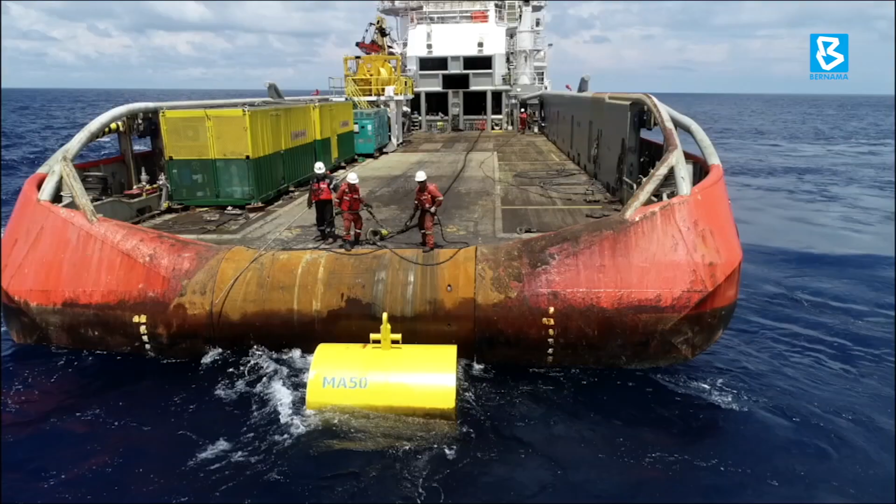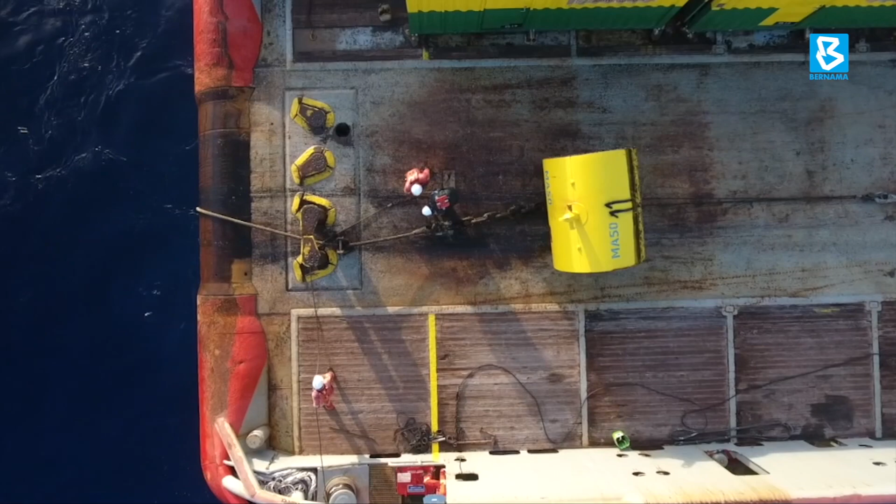Serba Dynamic Holdings Berhad is a dynamic and diversified international group with a focus-oriented approach, offering integrated engineering, contracting and maintenance services, system integrator and packages services. Their mission is to excel globally as a recognized total technical, engineering and commercial services provider, and to become a one-stop center engineering solution provider, offering engineering, procurement, construction and commissioning work, operations and maintenance services, as well as parts supplies.

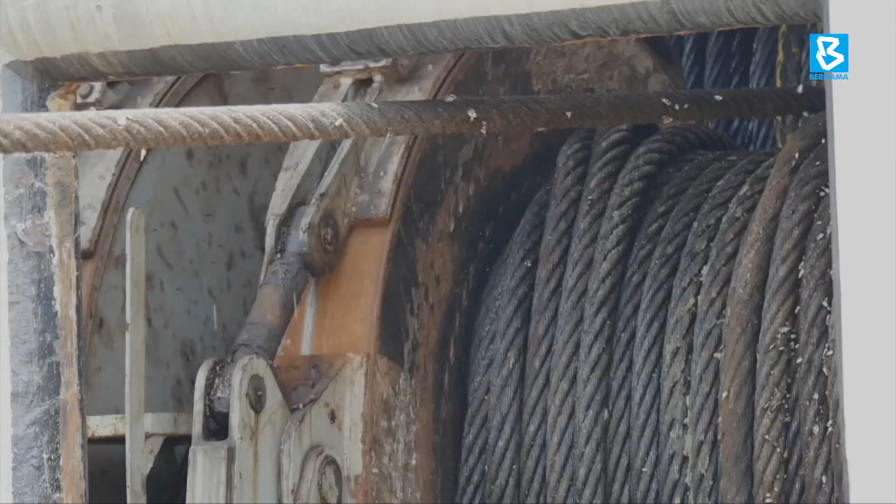I would say there are three important milestones in the entire growth of Serba Dynamic. During the early days, we were just focusing on field service capability. This means we have human resource capability from engineers to technicians to skilled labor, and of course we also need managerial project management capability. So we mobilize this team to the site and carry out the job. We call it field service activities.

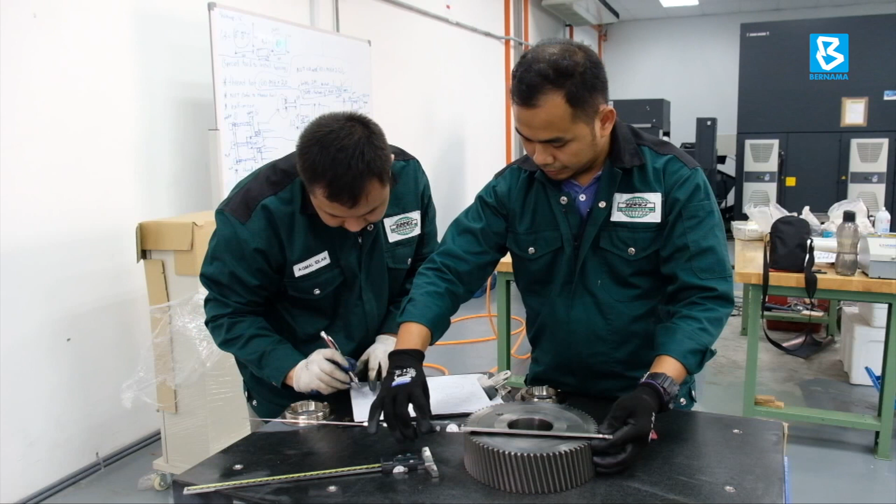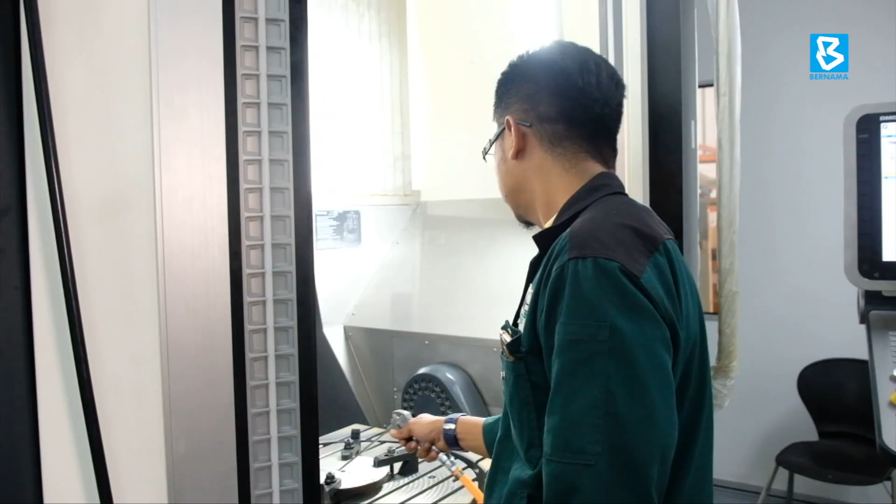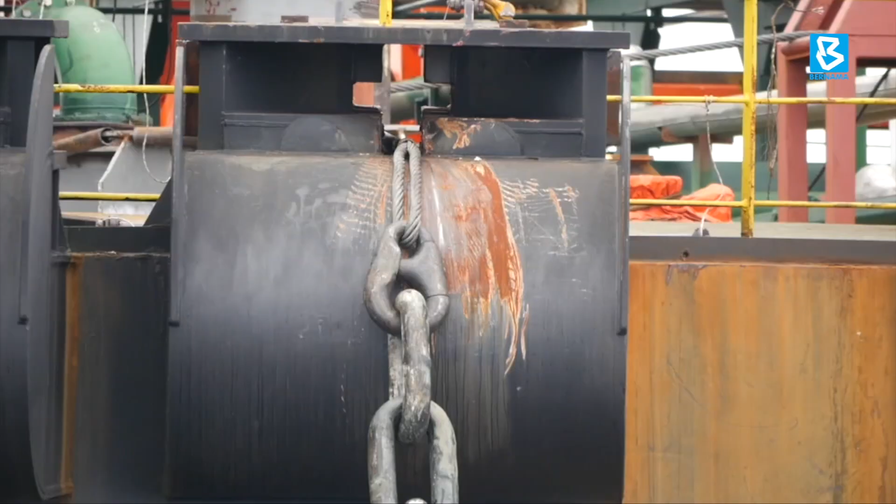In between the 26 years of our journey, after 14 to 15 years, we started our workshop capabilities, where equipment is brought into the workshops, and we have the capability to invest in buying some workshop machines. With that, we qualified for some offshore jobs under Petronas and also Shell, because in Malaysia, offshore activities are majority out of land, while in the Middle East it's different. Even though upstream offshore activities, some of it is actually based on land, so the terminology used needs to be defined properly.

But what I'm trying to say is the second milestone of growth is where we have the workshop service capability. And the third one, which is required to complete a full-fledged maintenance company, is the ability to manufacture components and parts of equipment.

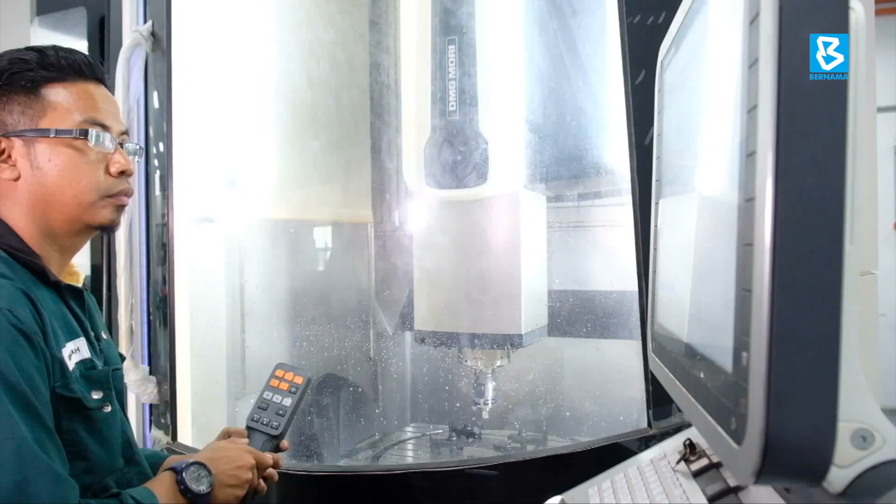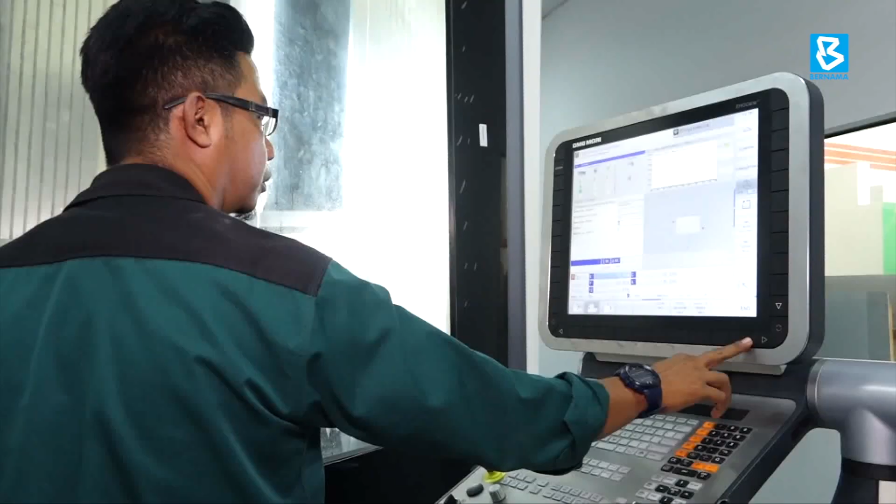I would say this was achieved via our successful listing of the company on the Bursa Stock Exchange of Malaysia, way back more than two years ago. This was a breakthrough, because through the acquisition of other companies with manufacturing capabilities, we completed the journey of positioning Serba Dynamic as a one-stop service provider. So we have the field service team, the workshop repair capabilities, and the ability to re-engineer parts and components of equipment.

Serba Dynamic's facilities now exist across continents like the United Kingdom, Indonesia and the Middle East, as well as in Malaysia, in Paka, Kemaman, Bintulu, Miri, Labuan, Kota Kinabalu, Meru and Subang, apart from its headquarters in Menara Serba Dynamic, Shah Alam. The workshop in Meru is a manufacturing and fabrication facility based on advanced reverse engineering technology and is among the main services.

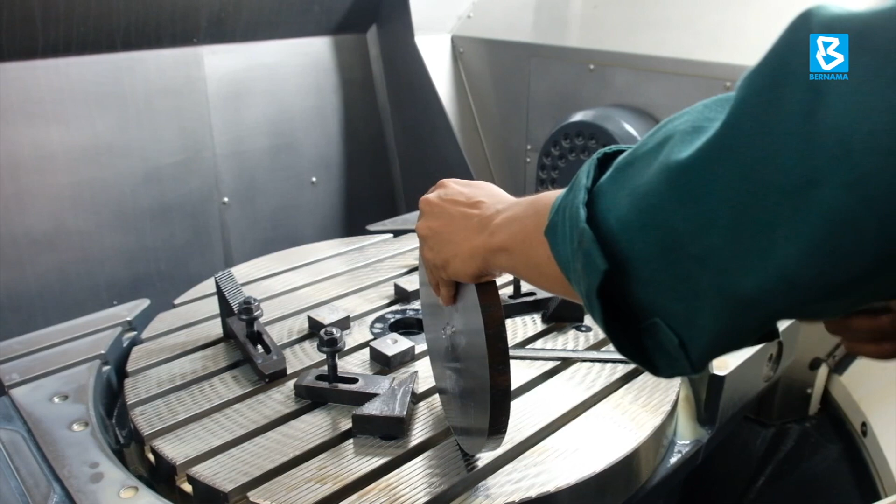Basically, in Meru, we have manufacturing jobs such as CNC machining and also assembling parts. For example, currently we are assembling a rotor lobe based on our client's requirement. So when we receive the job, we determine whether we can perform the job.

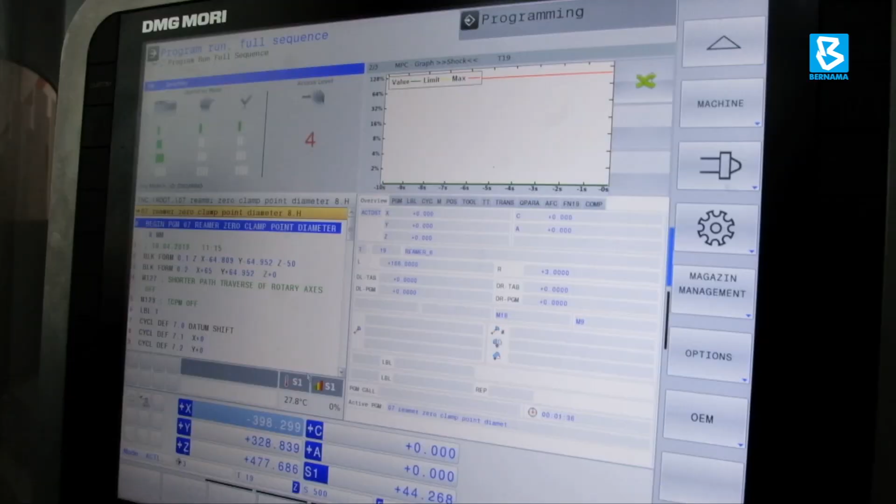We will check all the requirements, all the clearances. We will make a simulation. After we make the simulation, we will come up with the drawing, and after we come up with the drawing, we will proceed with the manufacturing job. After we finish manufacturing from CNC and also metal casting, die casting like that, we will then proceed to install.

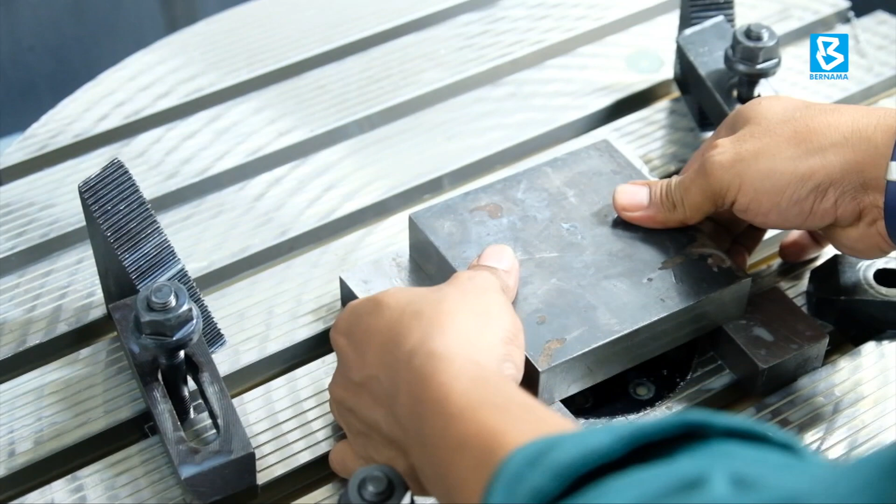Once we install, we will conduct a FAT, which is a factory acceptance test, to determine whether the equipment is safe and up to spec.

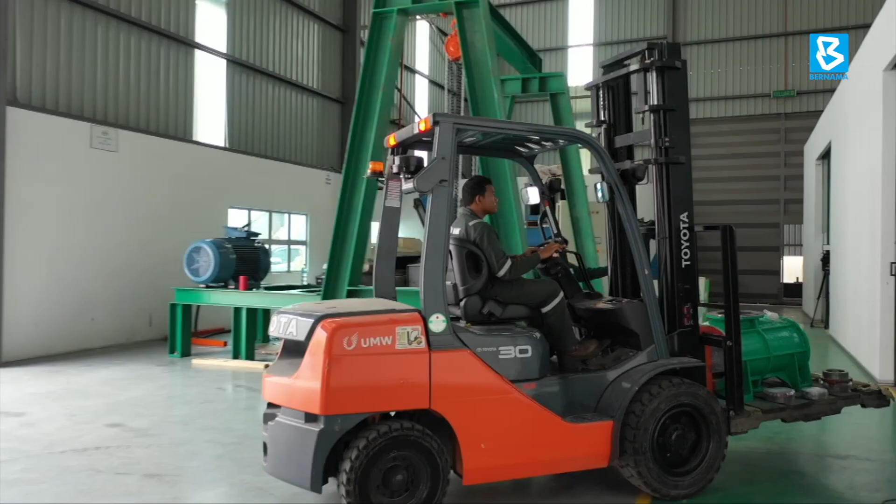Located in Meru, Klang, this workshop is led by mechanical and electrical engineers to ensure repair work and re-engineering is done at an optimum level. With proper adherence to engineering best practices, customers and visitors at the workshop must undergo a safety briefing to understand the layout of the workshop, important and risky spaces within, as well as rules to be followed. This briefing is also carried out on a recurring schedule to remind staff about safety rules.

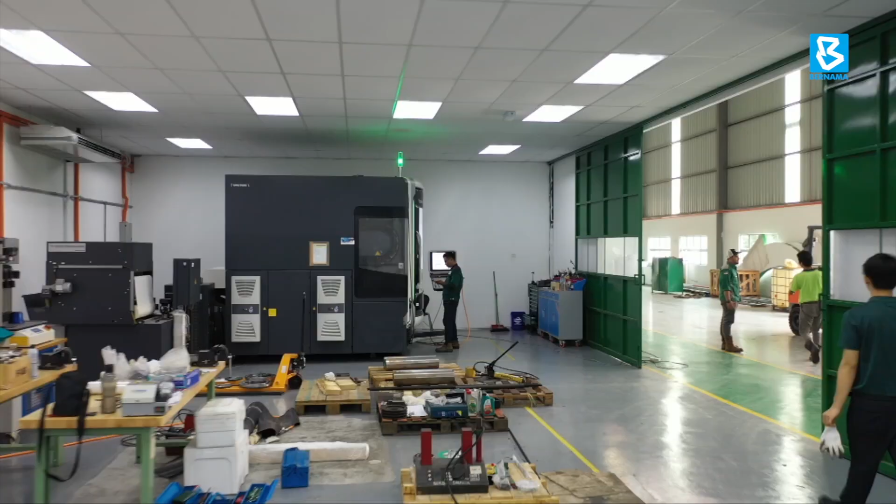Serba Dynamic has expanded the scope of engineering skills to enable reverse and re-engineering work to be done on rotating equipment spare parts, as well as repair and servicing on rotating equipment. Through this approach, customers are able to continue using equipment without interruption, either through repaired or replaced items, ensuring quality levels are just as good as new equipment.

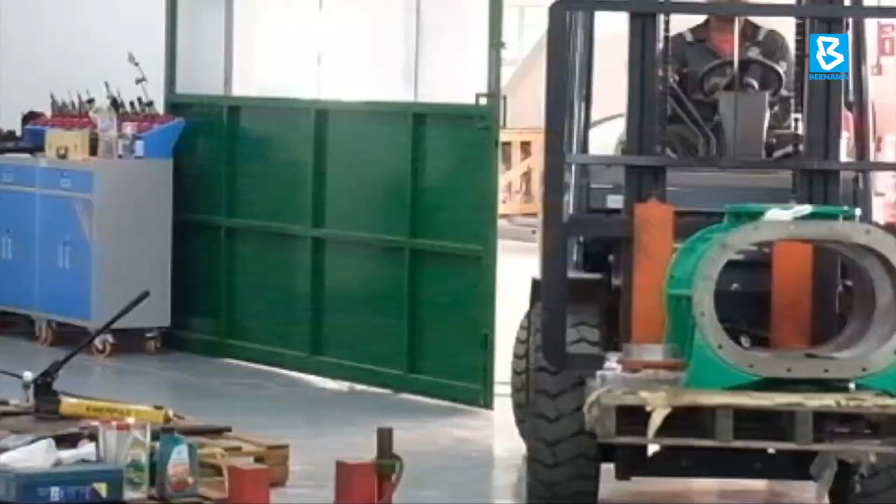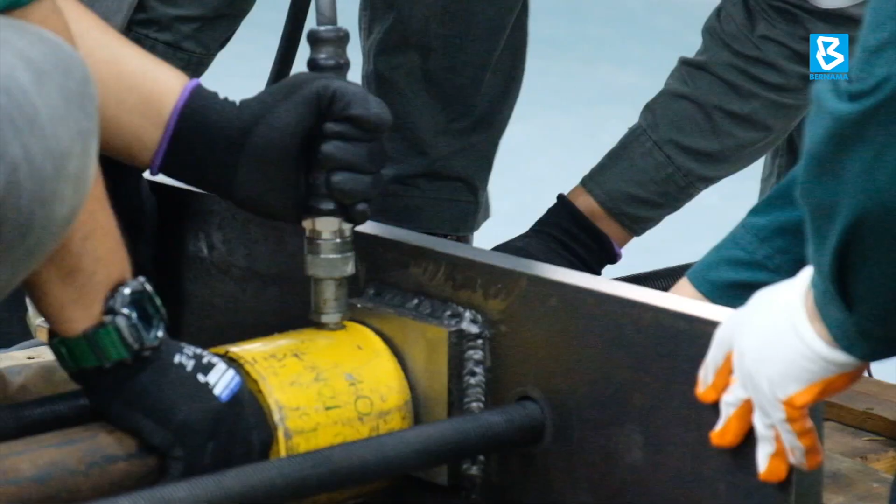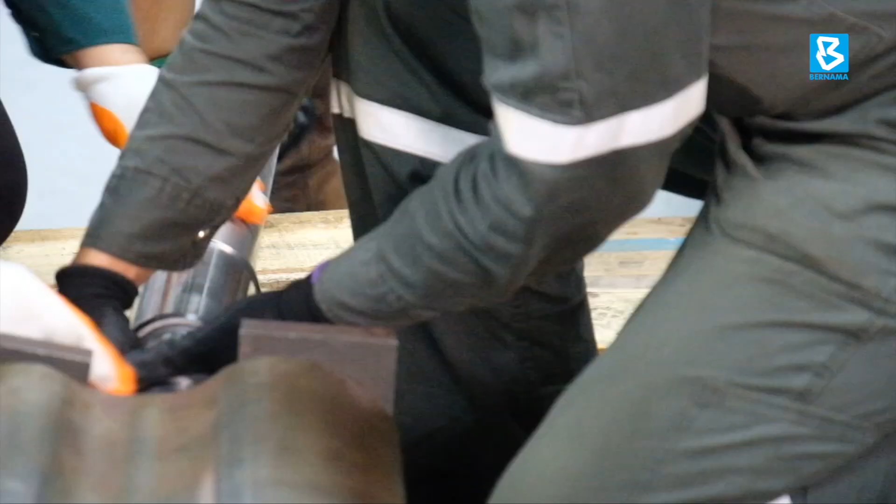The process flow for re-engineering work at the Meru workshop begins just as equipment is received from customers. With highly skilled labour, experience and machinery capacity, Serba Dynamic offers re-engineering and retrofitting services for pump spare parts such as impellers, casings and shafts, complete assemblies such as rotors and cartridges, or complete pumps.

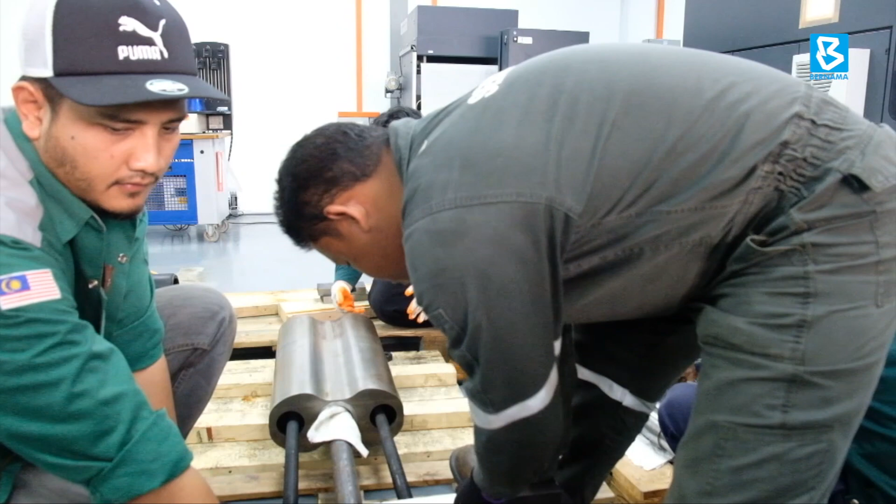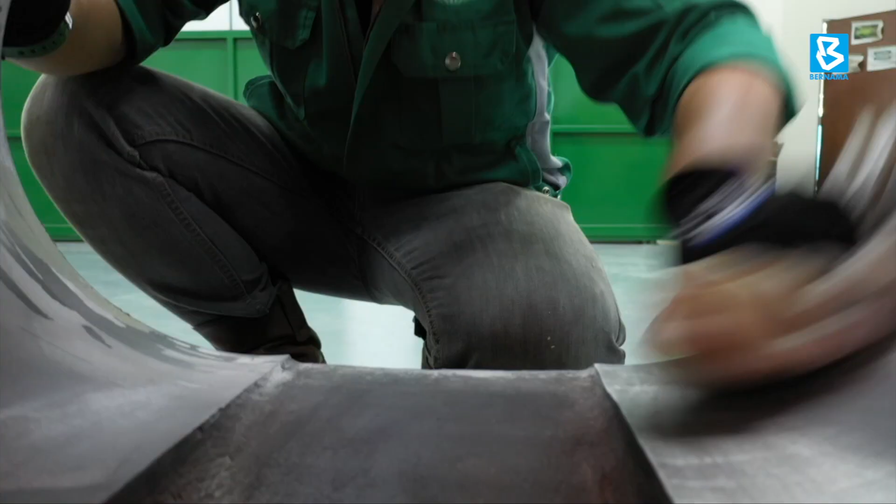After receiving the equipment from the customer, the work process enters the disassembly stage, where it is dismantled and separated into component parts to ensure exact repair work can be undertaken.

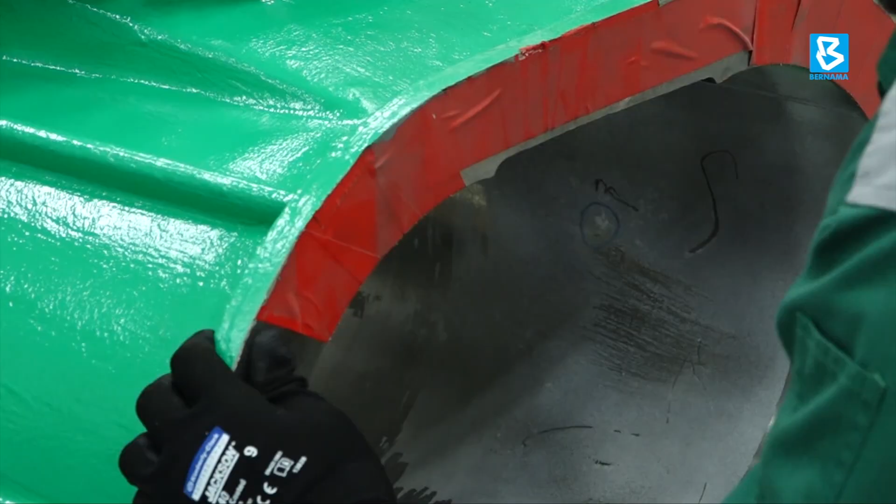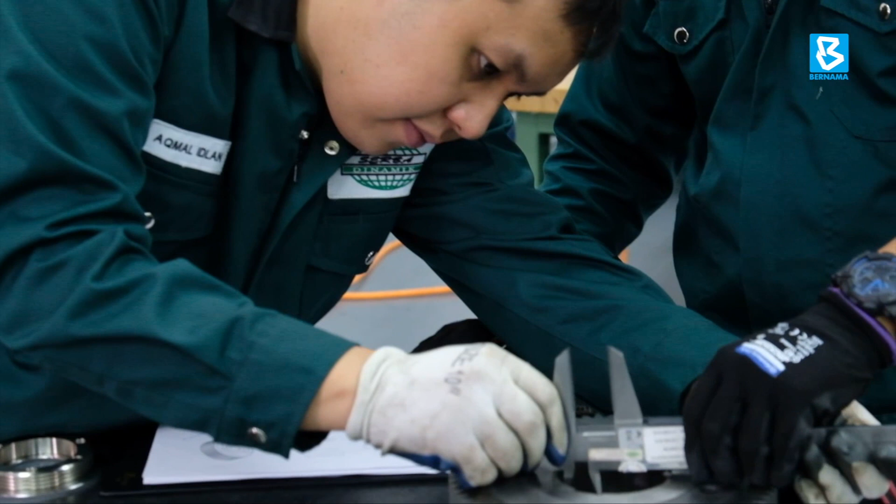Once that is completed, the involved component parts are cleaned before they move into the inspection stage.

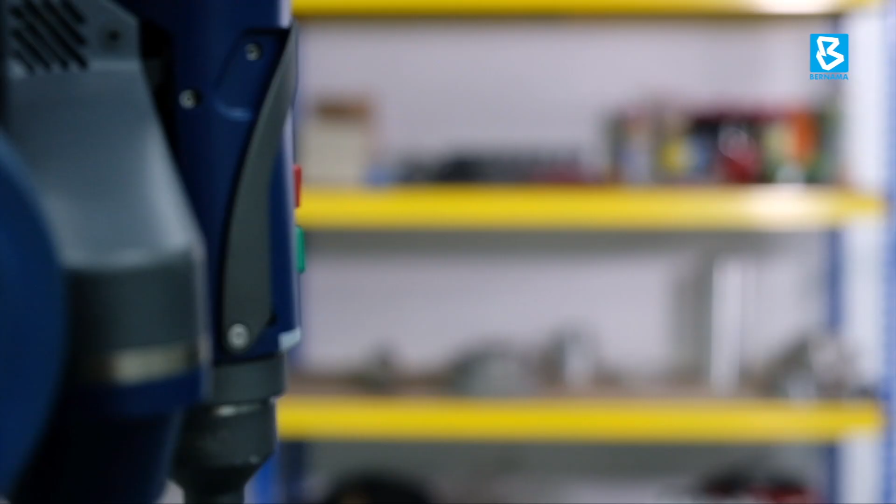Serba Dynamic is the top choice for total engineering solutions and has received obsolete equipment such as pumps and other old equipment that is no longer supported by the original equipment manufacturer. Serba Dynamic also prepares detailed sectional and full component drawings.

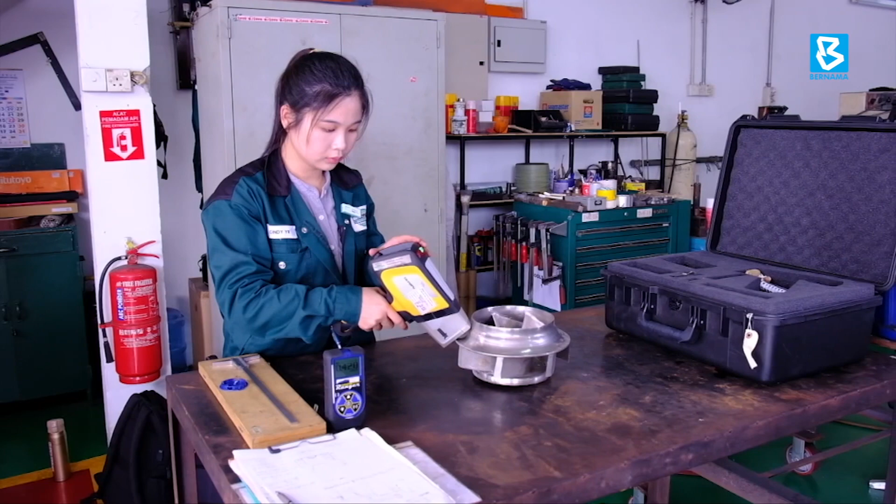The whole process of reverse engineering, retrofitting, and function of each step comprises material analysis, 3D capturing and measuring, CAD modeling, engineering analysis, and the manufacturing process, which is a CNC machine automated machining process with increased speed and quality of manufacturing, able to machine complex features.

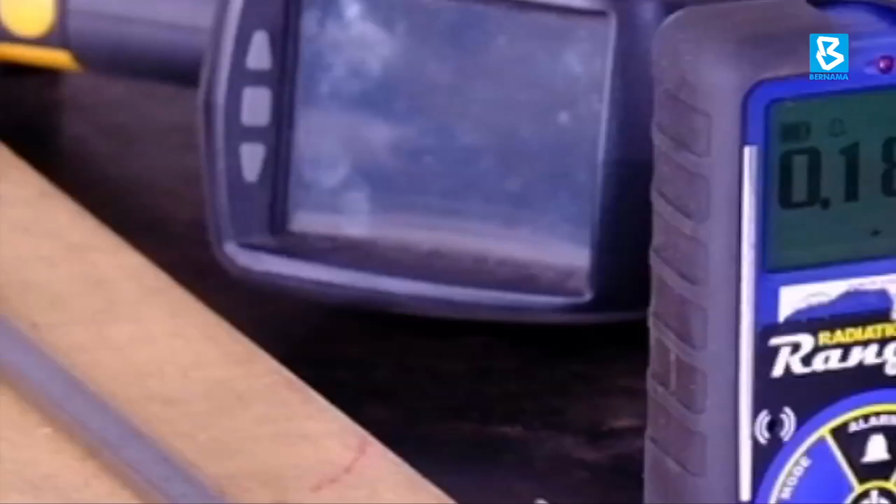For manufacturing metal products, engineering plastic products, wood products, gears, etc., the process carries out milling, turning, boring, polishing, grinding, and hobbing. Material analysis is an attempt to

determine the basic properties of materials that can be useful for designing structures, interfaces, and a variety of other things.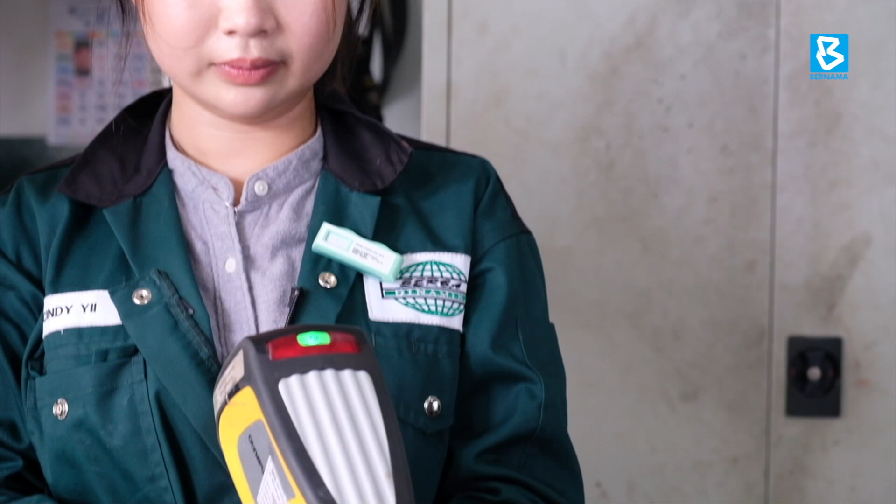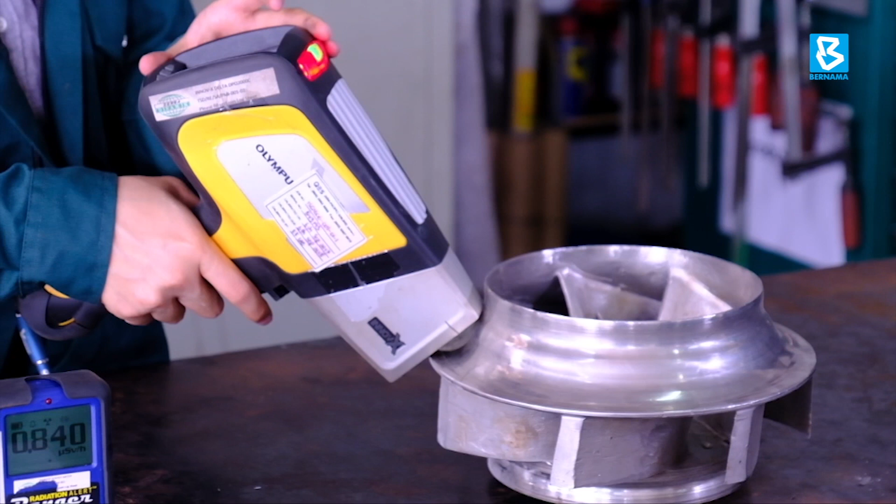3D scanning is a process of analyzing the equipment to collect data on its shape and appearance using a special sensor that captures all the contour information about the object or its surface. The collected data can then be used to construct digital 3D models.

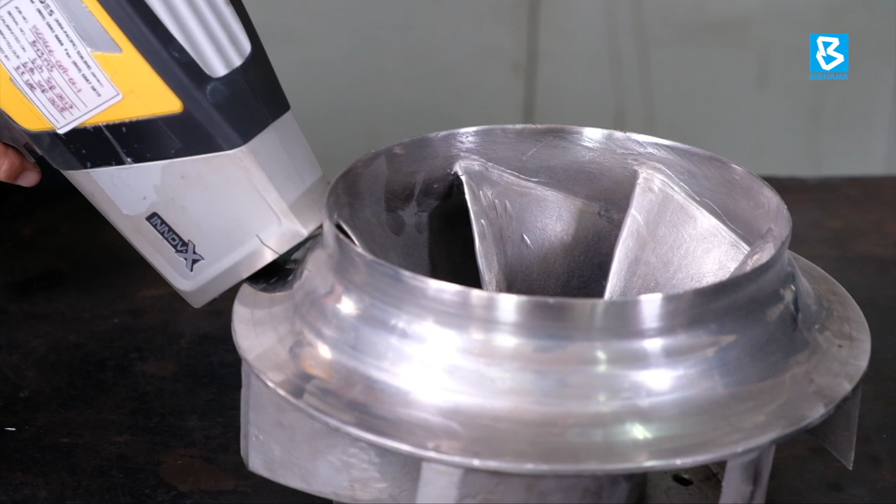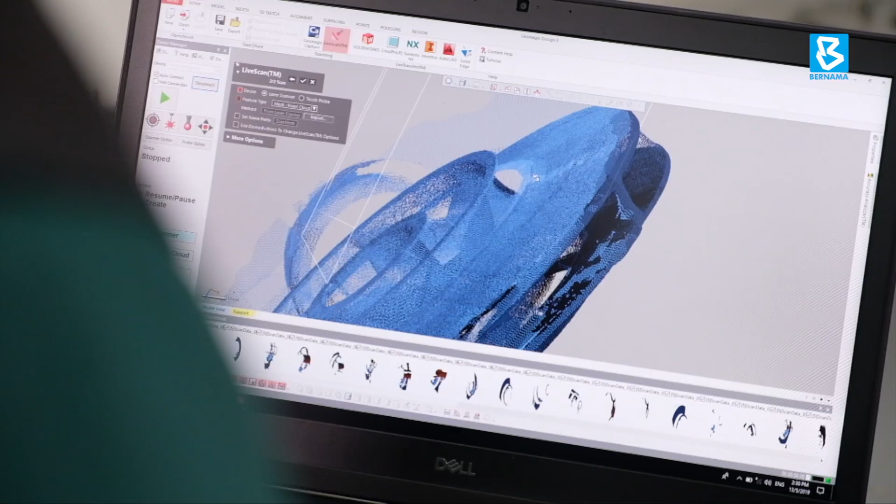The following stage uses a comprehensive analysis system through the application of ANSYS technology. It produces a computer model simulation of the structure or component and also displays the attributes of materials based on requirements such as flow rate, stress strain, maximum heating temperature, and so on.

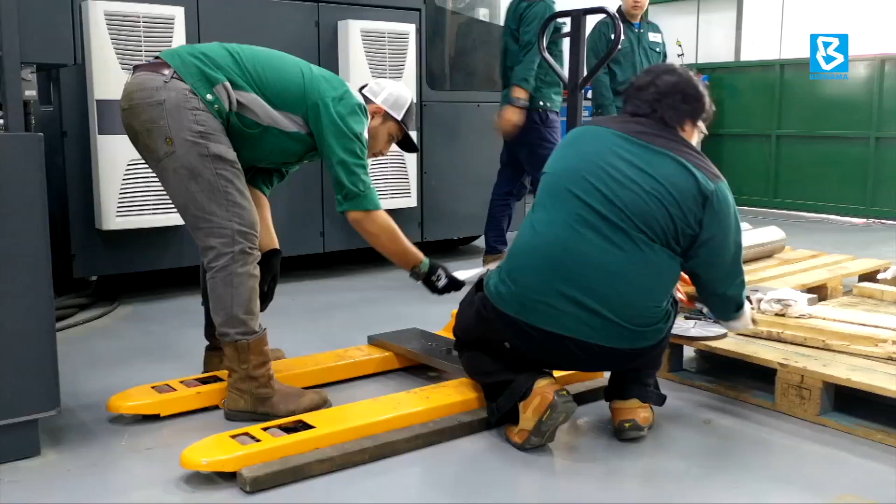In Meru, Klang, Serba Dinamik's workshop is furnished with special equipment specifically for total engineering and maintenance work on rotating equipment.

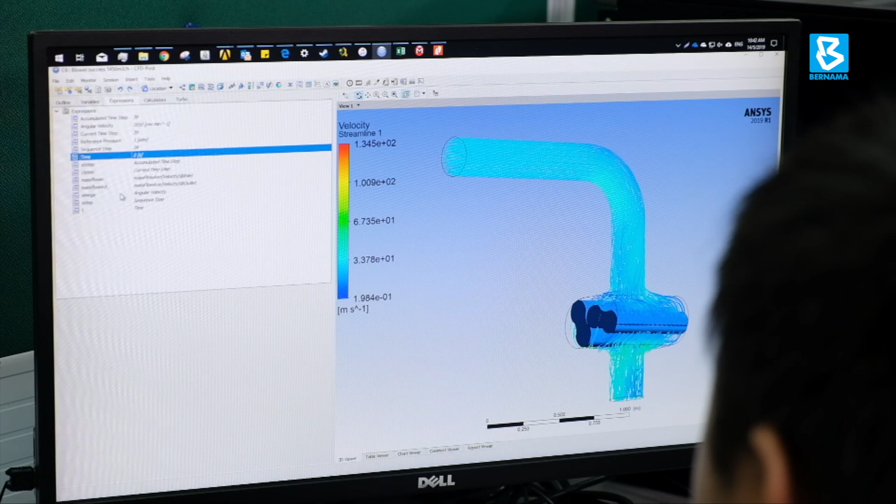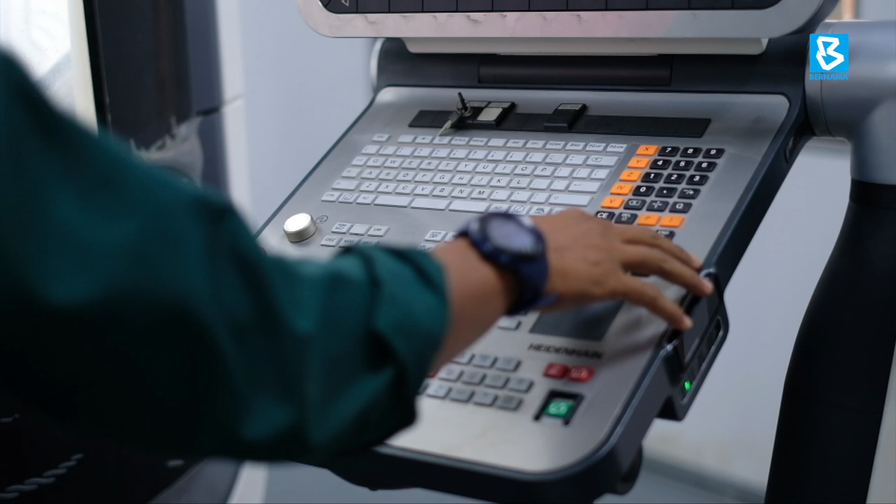From ANSYS, the next stage is the manufacturing process, which uses computer numerical control or CNC. At Serba Dinamik, it is 5-axis CNC machining, meaning the part or cutting tool moves along 5 different axes simultaneously, enabling the machining of very complex parts. 5-axis CNC machining is well known for providing greater precision and efficiency with less production interruption.

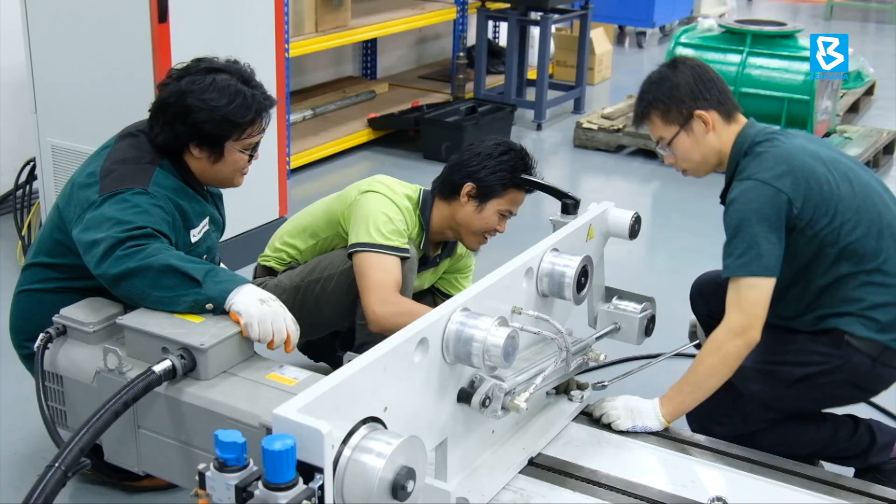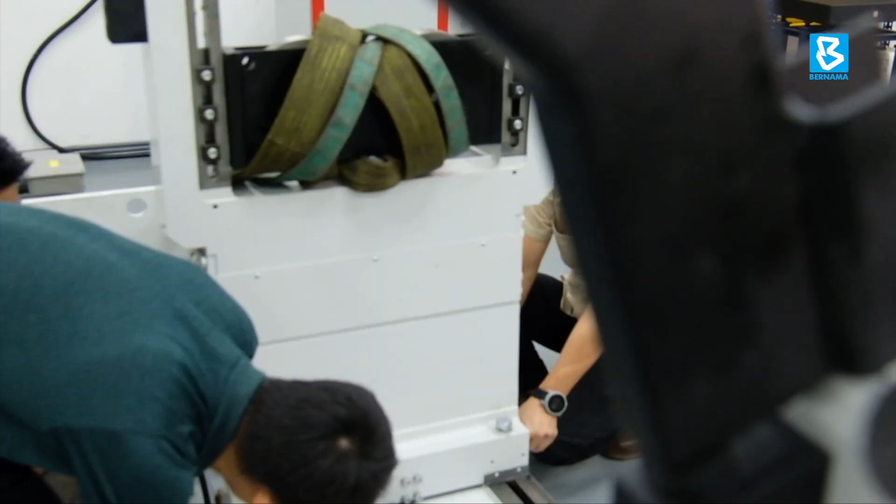If needed, the balancing process and data balancing is carried out at the Meru workshop, especially for rotating parts and machinery which require efficient balancing power.

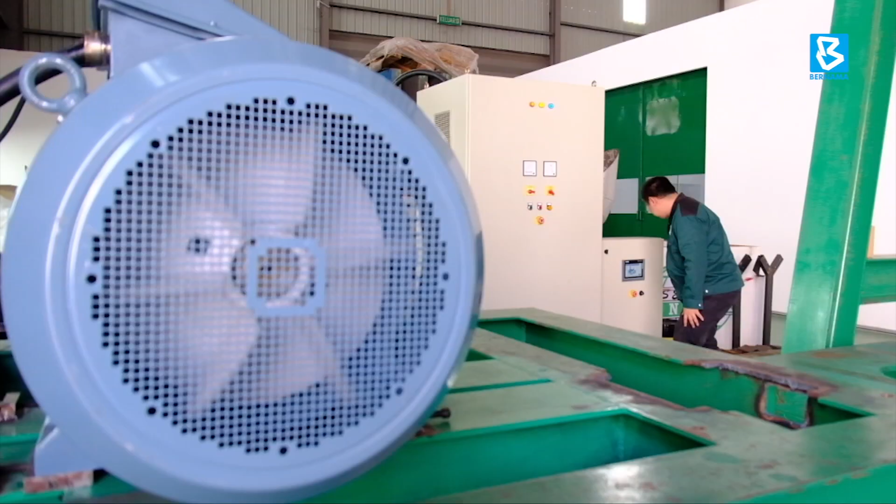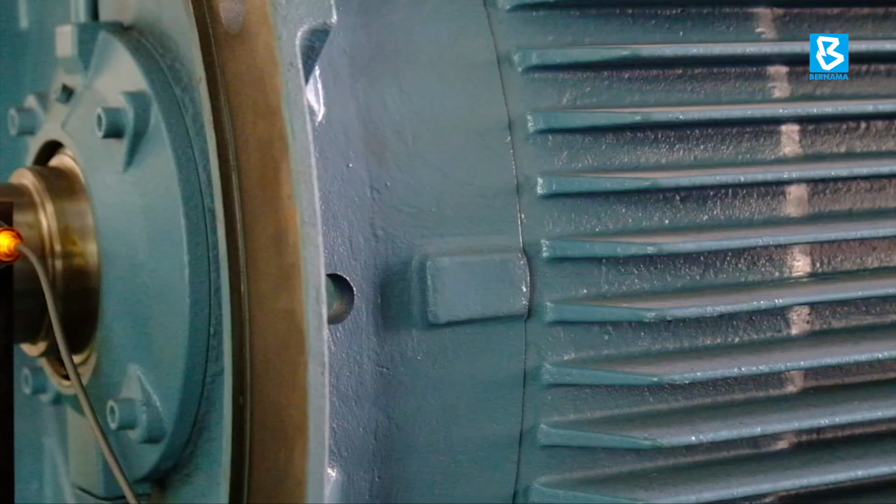Testing is the last stage before the equipment undergoes the assembly stage again, after which factory acceptance tests are performed.

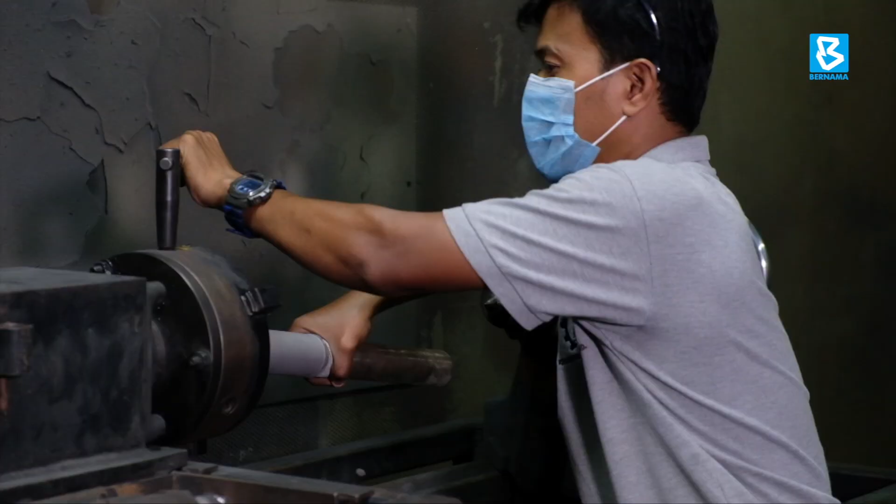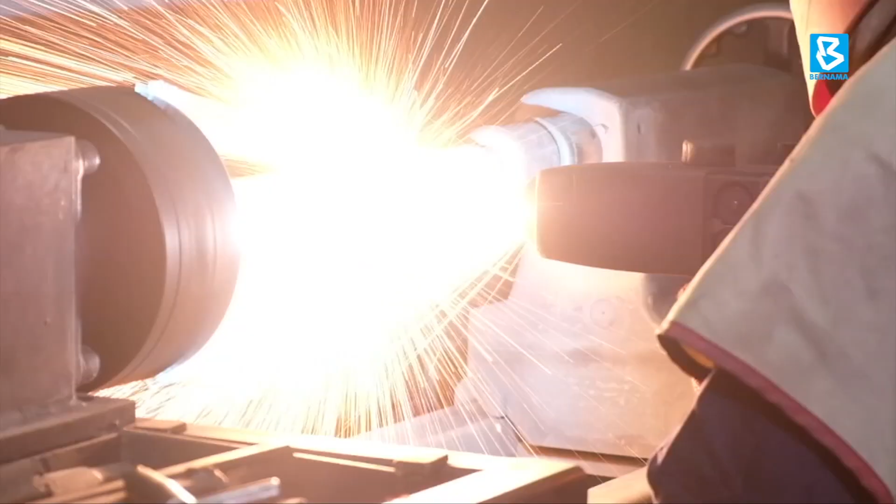Whereas for equipment that requires blasting process and weld or metal coating or metal spray, Serba Dinamik has another workshop which exclusively caters to these kinds of work, located in Subang. If and when needed, equipment is taken to Subang from Meru.

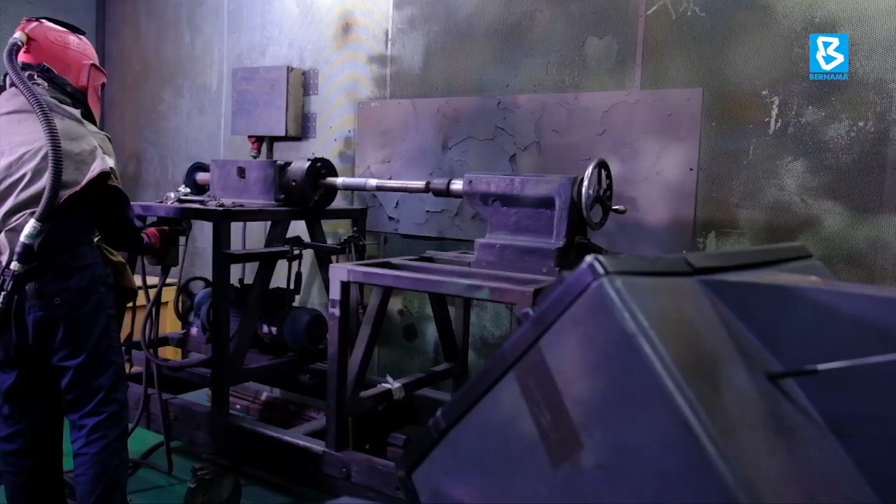For heat treatment, stress relief improves dimensional stability and toughness of a material, and improves mechanical properties such as hardness and strength. Casting is for complex shape parts and mass production, whereby coating, weld coating, and thermal spray provide increased durability, increased hardness, decreased friction, corrosion protection, increased wear resistance, and additional protection to damaged material.

A common problem faced by companies in engineering practices is that there is no efficient solution when components or certain equipment parts, such as pumps, experience damage or become obsolete. Original equipment manufacturers usually either sell replacement parts at an expensive rate or produce absolutely no repair options. This results in companies having to replace entire parts of equipment, even though a large portion still functions well.

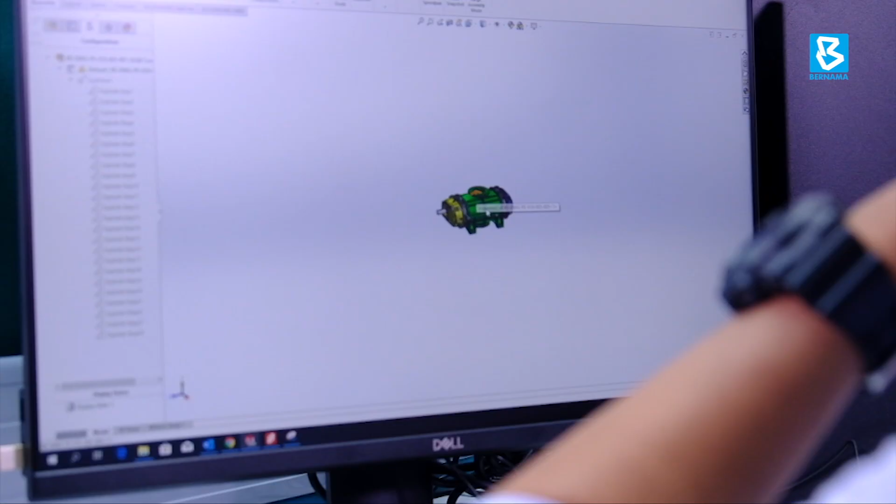Legal aspects, we look into it. For equipment which still has a valid patent, we will not encroach into it until we are clear that there is no legality issue that will put us in a difficult position to be sued by other parties. Then we will go for it.

To summarize, what I'm trying to say is the legal aspect is taken care of so that we will not fall into the situation of being sued.

Secondly, when we do these reverse engineering activities, we need in-depth knowledge from the process and also from thermodynamics aspects and a few other considerations, so that the component that is designed will suit and meet the requirements of the original aspect of it.

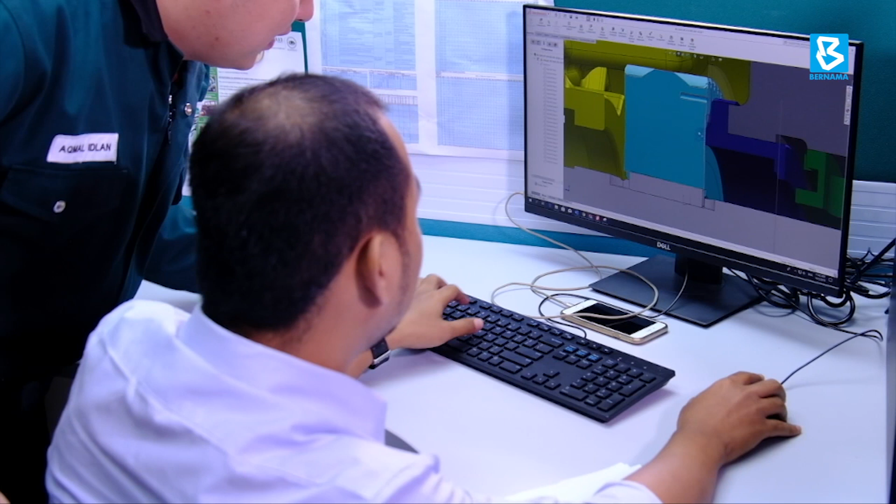Total engineering and maintenance for rotating equipment has become the trademark of Serba Dinamik through human resources, tools, proven techniques, products, and software developed through years of in-house R&D and work experience, to provide improved reliability, efficiency, and availability to their clients.

Amongst the main expertise of Serba Dinamik is the scope of reverse and re-engineering, which has become the best maintenance trend within the realm of engineering practices because it is economical and effective in terms of time, cost, and energy.